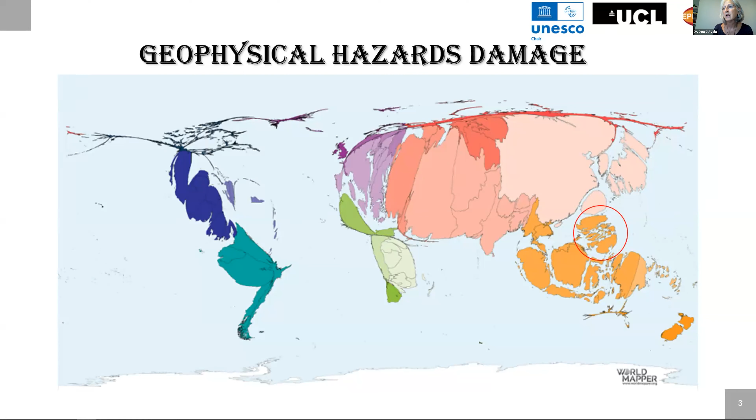So if indeed we map the geophysical hazard damage, so earthquake, volcanoes, landslides and so on, we can see now that the Philippines has fallen quite considerably because the level of hazards in the Philippines is very high. And similarly, if we look at the climatic hazard damage, they are indeed exposed to typhoons and to flooding and weather events quite often.

So if we then summarize this multi-hazard profile, and this is based on data produced by the Global Risk Data Platform of the UN, we can see that both earthquake, wind, cyclone winds, and floods have a large incidence throughout all the islands, and that the return periods are quite high. And if we sum up all the hazards, mapped here in red, we can see that the multi-hazard average annual loss runs in the thousands of USD million. So it's actually a very high proportion. It's one of the countries where the losses are the greatest.

And we know very well that hazard losses and, let's say, disaster means that a country can never properly develop because it needs to rebuild and reconstruct and renew every time. So this is clearly not a sustainable situation.

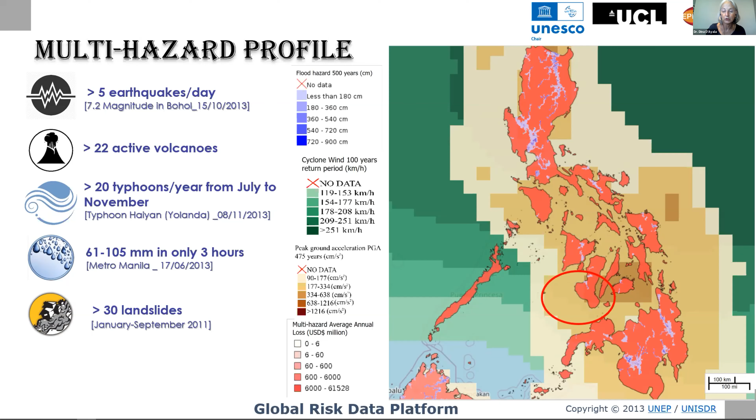For the rest of the talk, I will concentrate on two islands, Bohol and Cebu. Bohol and Cebu were affected by an earthquake in 2013, a very damaging earthquake. And then a few months later, they were also affected by the Yolanda or Haiyan typhoon. And this actually brought further destruction on the collapse and damage already caused by the earthquake.

Just to give you an idea, I'm going to focus on this building here, which is the Loboc Cathedral. Here we have a river and a bridge that went nowhere, but this is another story. You can see from this aerial view that the church is divided in two and that the transept is completely missing.

The Philippines, and in particular those islands, have heritage that goes back to the Spanish period, where several Catholic churches were built by the missionaries and the monks. Some of them are strikingly similar to the cathedrals that we see, for instance, in Peru, in Lima, and in other cities, because they were built by using very much the same technology

that was already distributed worldwide, and this is very interesting, in the 16th and 17th century through the friars' orders that disseminated the religion in this country, and at the same time, they also used local understanding and local technical construction to improve what they were doing.

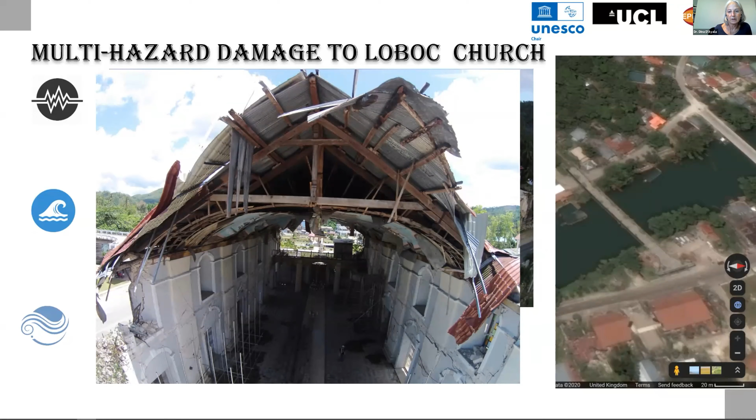And of course, then there was the issue of the water being absorbed into the structures. And then finally, also damage to the roof due to the Yolanda typhoon. This case is not an isolated case. In fact, we studied about 20 church complexes where you had the church, the convent, sometimes kitchen structures, bell towers, dormitories, schools, and some private homes where this damage was recurring.

So the National Historical Monument Commission required a systemic approach to this problem. And we were fortunate enough to work with them to develop such a systemic approach. So when we're talking about multi-hazard risk assessment, this is usually due to the fact that we are aware that there are several hazards.

We are aware of the fact that there is a wealth of assets that are exposed to such hazards, and we need to identify the resources needed. And then we need to compare the resources needed with the resources available. And very often the resources needed are much greater than the resources available. And therefore we need to think about who is in greater need of being prepared for the next hazards. So which of these assets needs more restoration?

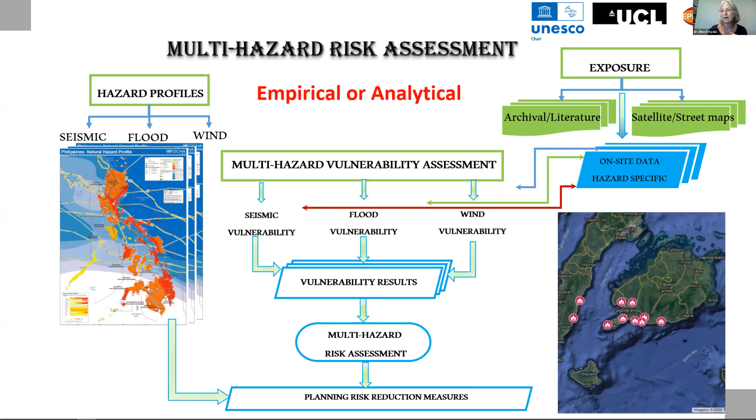So this approach can be either empirical or analytical. It can either be based on observational side or can be done with, let's say, mathematical models and numerical models. So depending on the level of information and the level of approach, we can have different levels of risk assessment. So for instance, here in the green box, we are considering what we call a level 1, where we will do rapid visual surveys.

This will allow us to determine what we call risk prioritization, just say that certain buildings in a particular environment or in different environments, but exposed to the same hazards, might have different priority, and we will see how we can determine these priorities.

Or we can have an extreme, very detailed modeling that looks at one particular asset. So for instance, we could study in very great detail the Loboc Cathedral that I've just presented, and we could do very advanced models, non-linear, with a high probabilistic model of the hazards if we have sufficient information at the site, and come up with this.

Or we can choose an intermediate level, where we can indeed develop some simplified structural modeling, which allows us to have sufficient engineering input in the process by which we can understand how mechanically this building responds to the loading and the effect of the hazards, and therefore allow us to make informed decisions on the mitigation measures that we are considering in terms of repair, restoration, or strengthening.

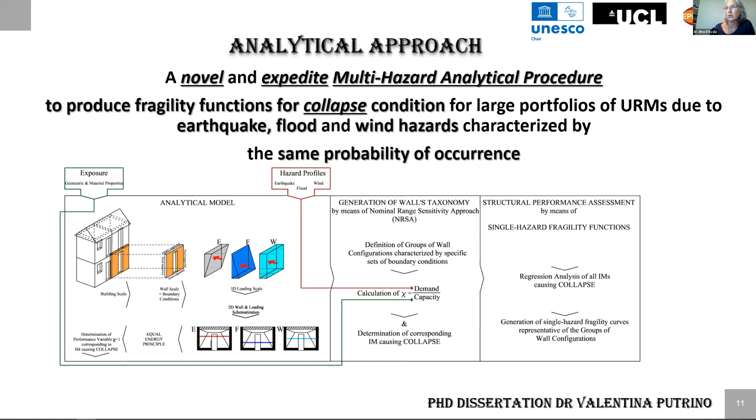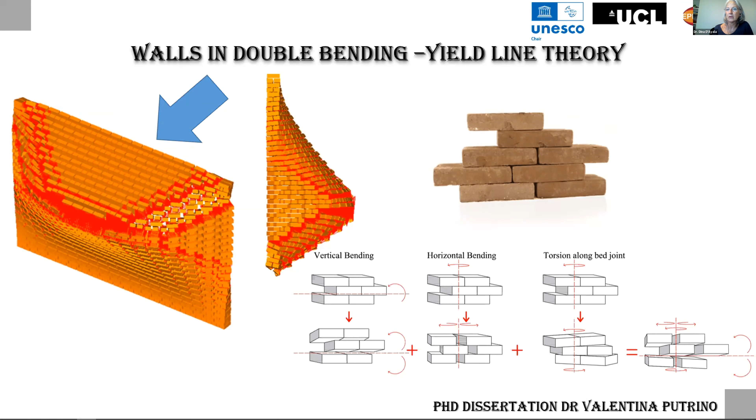But if we can describe each of these effects at local level, we can then develop some relatively simple equations that can be used at the level of the panel in order to determine their capacity. And in order to further simplify things and make it scalable for different hazards, we have also simplified the loading. First of all, instead of considering the dynamic effect, we are considering the static effect.

But also, instead of considering the impact of the load and its distribution on the whole panel, we are considering the resultant of this surface distribution as individual line loading, because this makes the whole problem simpler from an analytical point of view, from a mathematical point of view. So we will see that we have then done various calibrations to make sure that this actually doesn't affect the results.

So how do we approach this? In order to have a generic methodology, we need to consider many different types of walls with different geometry, different aspect ratios, different types of constraints, different layouts, presence or not of windows, and this will give us different groups of wall panels. We then need to consider different sizes, different ratios, as I said. We need to consider the relationship of the size of the panel to the size of the brick units. So we will also consider different sizes of the units and different material characteristics, i.e. their capacity to resist flexure in two directions and also the capacity to resist shear.

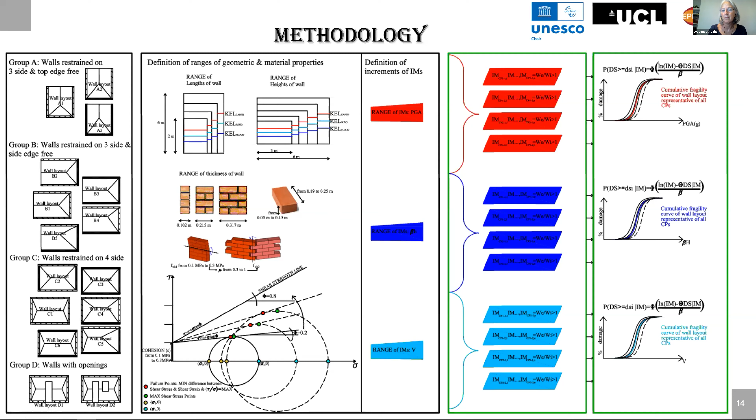Before going on to the results, please let me know how much more time I have, if any.

We can look at the inputs, but also at the fact that, again, we need to consider how the cracks will form in the real brickwork. And this will be strongly influenced by the resultant of the load at a particular height. So for instance, if this is flood loading, we know that the flood will have a hydrostatic distribution that is triangular, and therefore the resultant will be at about 1/3 of the height if the flood goes to the full height of the wall. And that push at that level will create the failure.

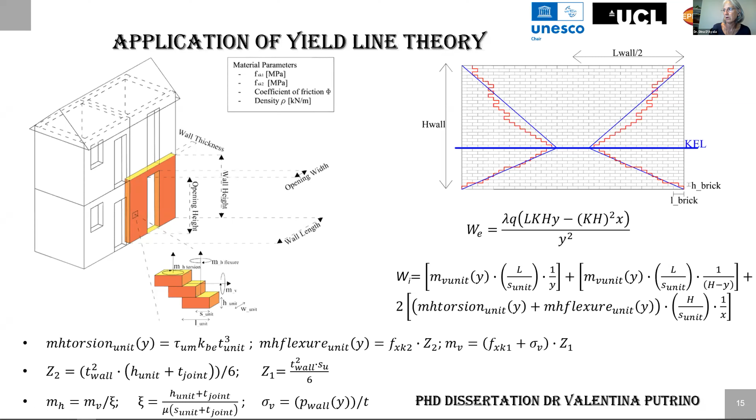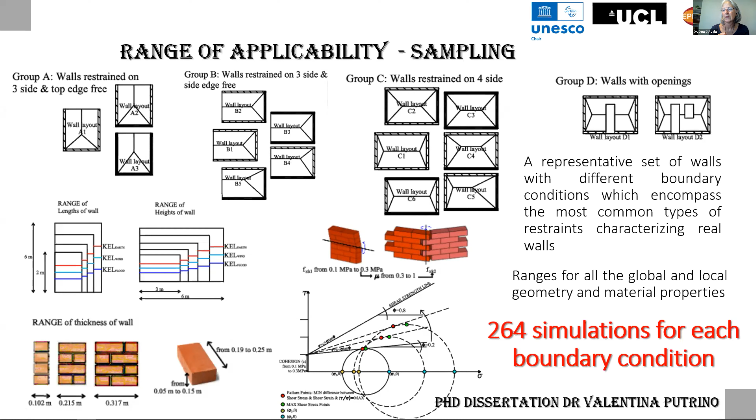By using virtual work and by equating the work done by the applied load with the internal resistance and dissipation of energy done by the moments, we can then equate and optimize, and we will find the minimal collapse factor, which identifies the intensity at which the wall fails. So in order to generalize this, we have done 264 simulations for each boundary condition, changing the geometry, the characteristics of the materials and of the bricks, the presence of openings and so on, so that we have a sufficient set to then do regressions.

This is done via a relatively simple Excel-based and Visual Basic-based program that basically considers a large number of possible paths to collapse and then converges on the one that provides the smallest collapse factor, as I already mentioned.

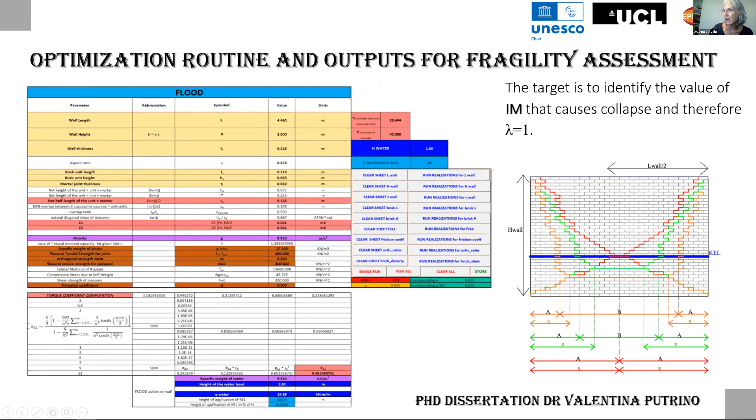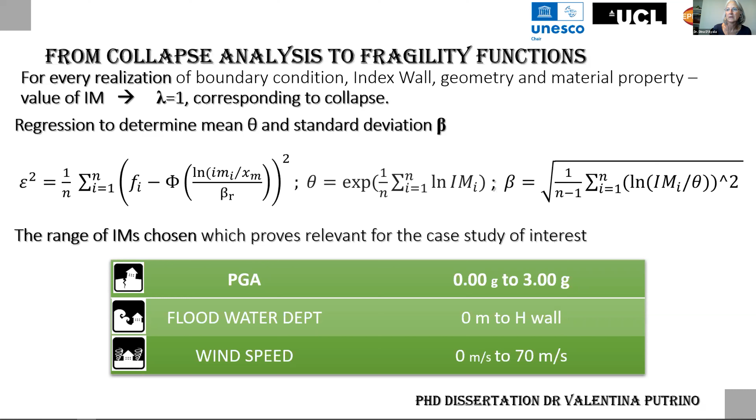And the collapse factor will be the one that gives the value of 1 for that identified intensity measure. So we can then consider a large range of PGAs, water depths, or wind speeds, so accelerations, in order to get the regressions to determine the mean and the standard deviation of our regressions. And this brings us to considering a number of different fragility functions.

So here, for instance, we are looking at fragility functions for different groups that represent different constraint conditions. Very often when you go on site, you will not know what the constraint conditions are initially. So you will only have the geometry. So we cannot discern between these different groups. So we have just one unique fragility function that gives us a particular fragility for the entire group. And this, as you can see, is different. Or if we have a lot of information, we know about the

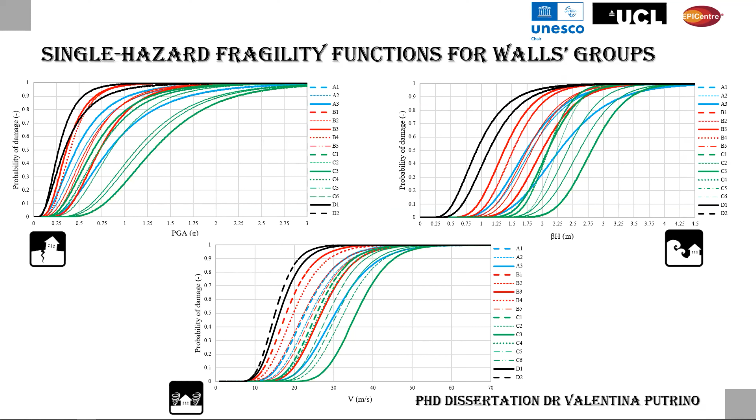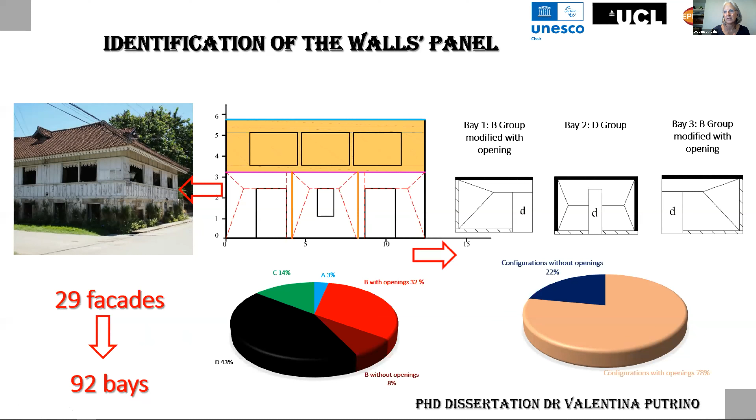So depending on the presence of, for instance, internal walls here and the presence of the window, we can divide the complex facade in panels, and we can analyze the panels separately, associating them to a particular group, which is then modified with the opening. As you have seen earlier, there were openings only in 2 types of groups, but now we are also considering the opening for other groups. So we have tried this on 29 facades, we obtain more than 90 panels, and these panels can be categorized as the pies that you see down here.

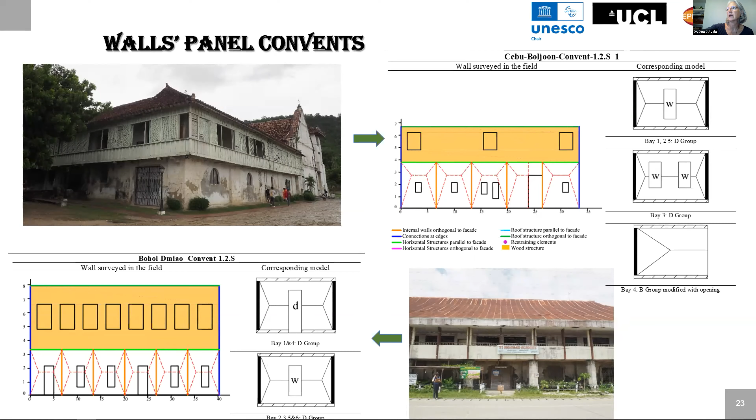So these are, for instance, 2 examples where the upper and lower constraints will also be dependent on the type of flooring and the type of roof that we have, whether the roof or the floor is tied into the structures, which is something that is common not only in the Philippines in this type of constructions, but also in Peru. And depending on that, we will have different collapse mechanisms. So these are the parameters that we need to run our analysis. As you can see, there are only 12 parameters, and these are the range of values in the samples that we have identified.

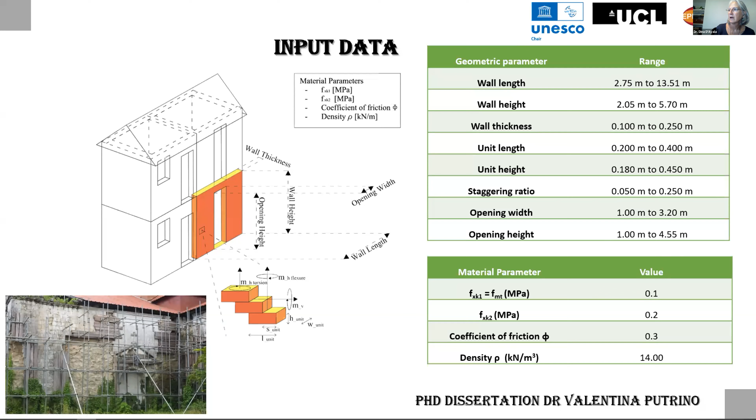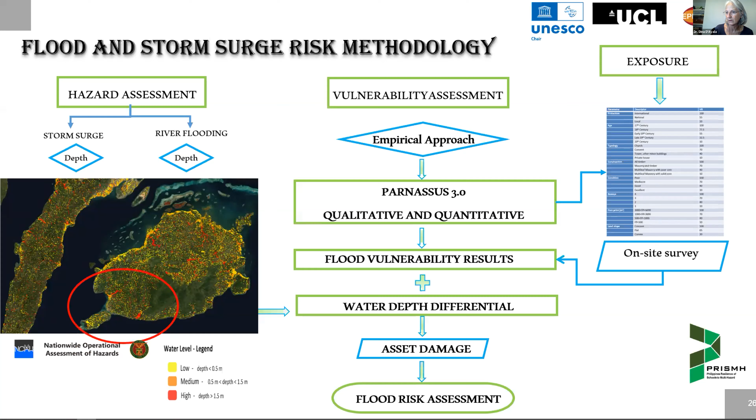We are concentrating on the southwest of the island of Bohol. We identify the area, we identify the parameters that are specific to each building. We then determine the data collections, and we create what we call a vulnerability index, which is the result of the scoring of each of the indices. This provides us with a vulnerability curve for the samples.

And we can then determine damage functions, which include economic losses, but also historic values. And we can then, for each of the buildings and for each of the water depths associated to a particular position, identify the number of buildings that will be at a certain value of that depth, and therefore the overall cumulative risk and cost to repair or mitigate.

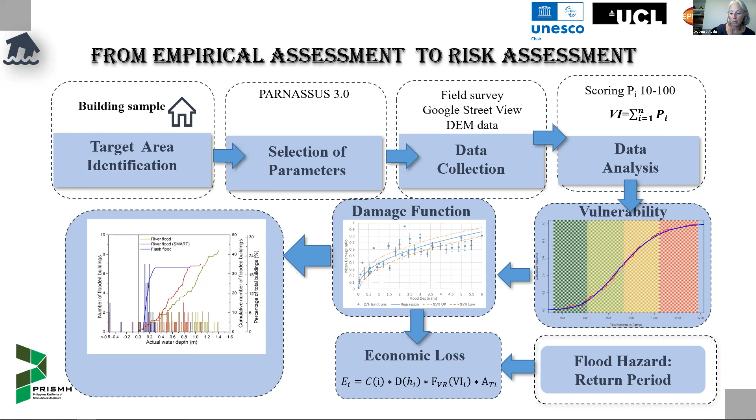So this is, for instance, the case for some of the churches in the southwest of Bohol, and you can see that the level of flooding or the level of storm surge is different for the different churches, with a 100-year return period.

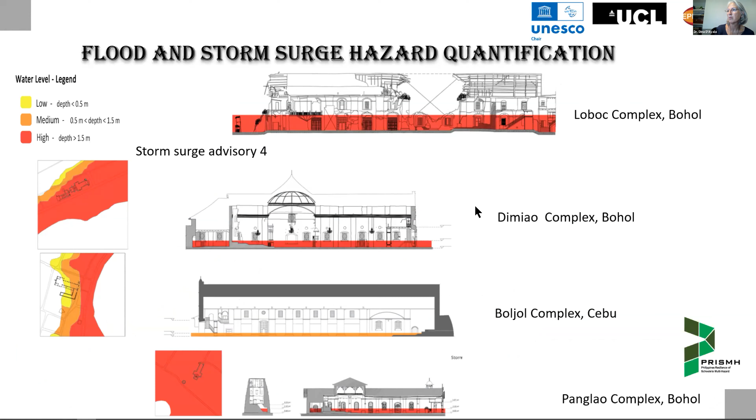These are the type of information that we collect, and this is in relation to the convent in Cebu. We can see here clearly what is the effect of this flooding on this building, and how this can be prevented, for instance, by having barriers or solutions outside of the building, so that the water will not reach the structure itself, such as the level of the drainage system, the surface permeability, the creation of a plinth. Very often these buildings don't have a plinth, and the internal flooring is lower than the external level of the ground.

So we can create distributions, as I said, for each of these indicators, and for the scoring, that distribution can be divided in quartiles to decide which are the ones at greatest risk. And then we can associate a level of risk to each of them.

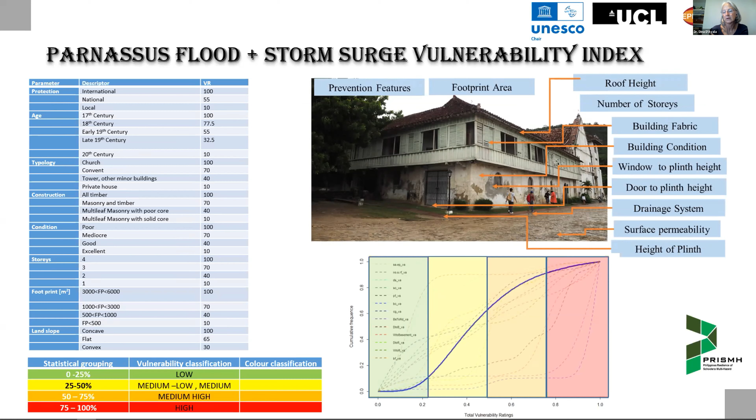And if we repeat this process for all other hazards in a similar way, just by using a number of indicators and considering different effects, then we can actually arrive at a qualitative risk assessment, which again allows us to compare the different risks associated to the different hazards, and therefore to make decisions in terms of the mitigation that needs to be taken.

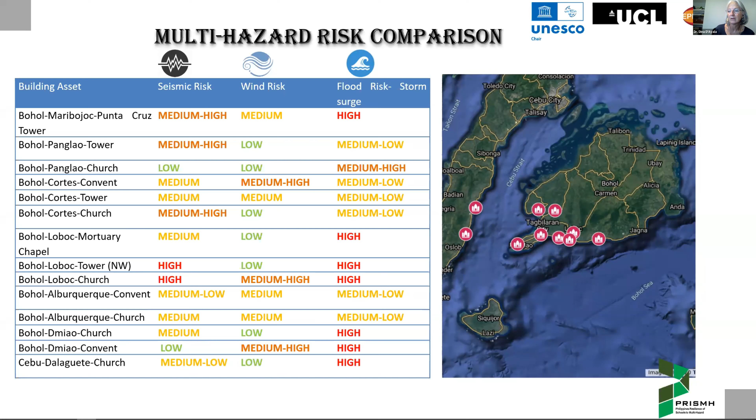So this concludes my presentation. I'm sorry if I've gone a little bit over the time. The objective is to find the right balance between accuracy and simplicity, especially when we are dealing with so many different assets and heritage assets. The limitation is very often due to the hazard characterization. So what do we really know about the hazards and how good is the availability of data, and that will determine the data collection strategy. Collecting data is always very expensive, so it's very important to know what data is already there.

Whether the engineering expertise is there and available to identify the failure modes and to identify how to compute their capacity, and then the ability to determine commensurate fragility functions for different hazards that can then be used to determine effective risk. And these actually have a very good visual character and content that can help effectively communicate risk to the administration and help in the attempt to secure investment.

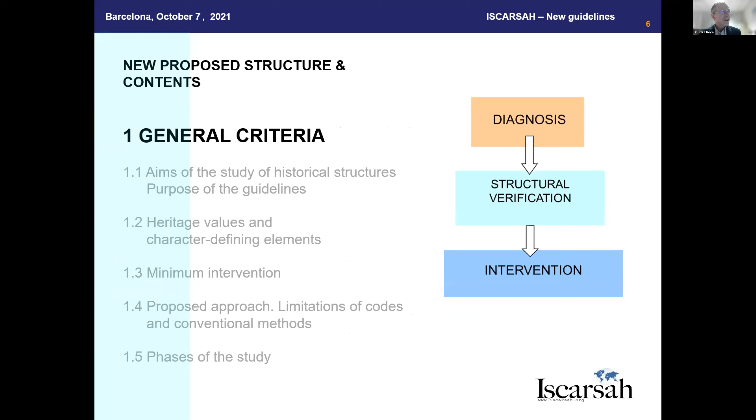Let me focus on them. But first, let me state with more clarity the purpose of the guidelines. First, we want to provide criteria and assistance for the study and intervention on heritage structures. In particular, we would like to provide guidance in the application of more fundamental documents, such as the ISCARSAH principles and the Annex I on heritage structures of ISO 13822 that I already mentioned.

The guidelines we are now developing are based on the premise that the study and care of architectural heritage requires a combination of both scientific and cultural insight. The design of an intervention must be oriented to identify the best possible solution, considering both the structural performance - what the structure should be able to attain in terms of safety and satisfactory performance, to avoid any problem to people - and, along with this, the heritage values must be considered, since possible interventions may impact on the heritage values in which the cultural value of the building resides.

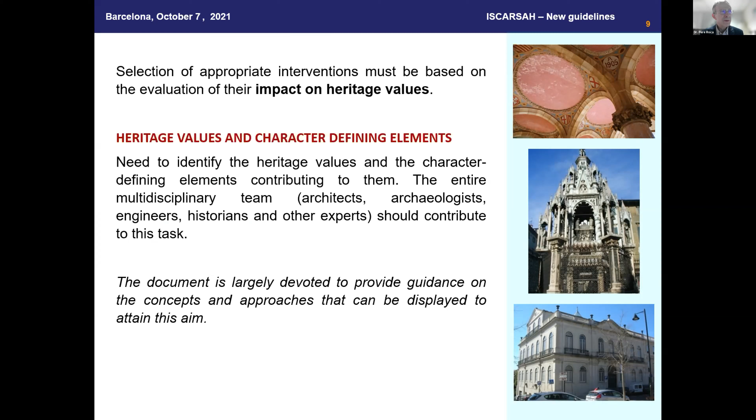Again, this is a task entitled to the entire multidisciplinary team, including architects, archaeologists, engineers, historians, chemists, and other possible experts, who should contribute to identifying the heritage values and the character-defining elements. However, the guidelines try to help in this activity, trying to identify some possible character-defining elements. We distinguish between tangible and intangible character-defining elements.

Among the tangible character-defining elements, we identify the geometry, including the shape, the spatial configuration, the formal design, the materials and fabrics, the overall structural organization, the construction details and the connections between or among elements, the location and setting, either urban or rural, and significant historic modifications.

We understand that all architectural additions that may have been produced in different historical periods contribute to the final configuration of the building and should be respected. And perhaps even more controversial, we also believe that imperfections and damage should also be identified as character-defining elements and should be respected because they also contribute to the final historical configuration of the building, to what the building finally is, all the aspects that may have influence on its history.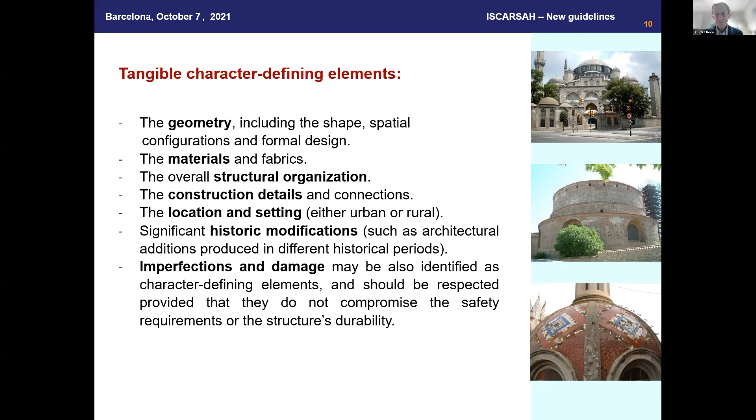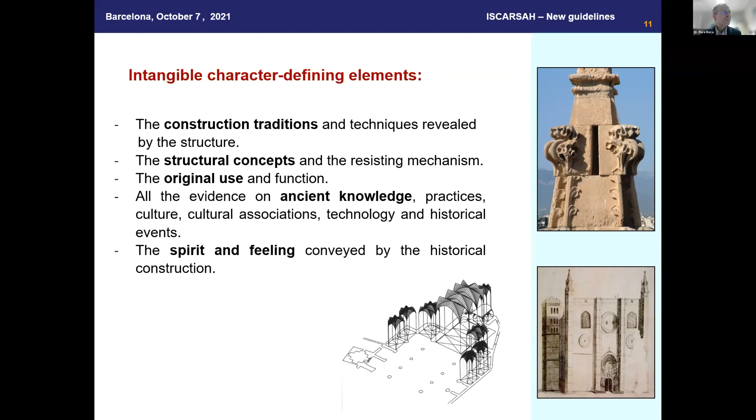Among the intangible character-defining elements, we identify the construction traditions and techniques, historical techniques, as revealed by the structure, the structural concepts and resisting mechanisms of the structure, the original use and function, all the evidence on ancient knowledge, ancient practices, culture, cultural associations, technologies, as also revealed by the structure, and the spirit and feeling conveyed by the historical construction, among other possible intangible character-defining elements.

We also suggest, as a very central idea in the guidelines, that any intervention on a heritage structure will cause, to some degree, certain positive or negative impact on the heritage values. We should be able, at this stage, to identify the heritage values and should also be able to quantify the possible positive or negative impact of possible interventions on these heritage values.

At this stage, we are in the condition of introducing the concept of minimum intervention. That's also a critical concept which recurrently appears in the guidelines. We propose a definition: minimum intervention is defined as an intervention that optimally combines compliance with structural requirements with the maximum possible protection and enhancement of the heritage values.

We should obviously comply with the structural requirements, I will insist later on this. However, we should do so in a way that allows us to respect and even enhance the heritage values identified in the building. Obviously, the minimum intervention must ensure the protection of human life while also paying attention to environmental issues and cost effectiveness. Actually, the guidelines are largely devoted to discussing the strategies and approaches that may lead to the design of minimum interventions, and I will try to briefly refer to them and illustrate how the guidelines intend engineers and architects to deal with these difficult problems.

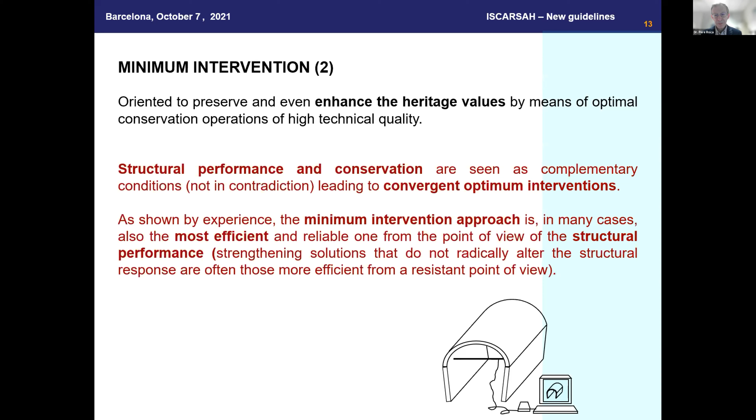The guidelines recognize that conventional calculation techniques and legal codes or standards, normally oriented to the design of modern constructions, may be difficult to apply or even inapplicable to ancient constructions. Conventional calculation techniques and legal codes may not be useful for the study of a historical structure. Therefore, we need an alternative approach.

As an alternative, we propose a more flexible, multidisciplinary approach, strongly based on the scientific method, combining at least 4 activities: historical research on the building, inspection oriented to investigate the present condition, decay and damage in the building, monitoring, and structural analysis. All these activities are equally important and complementary, and should be conveniently integrated and combined in the analysis.

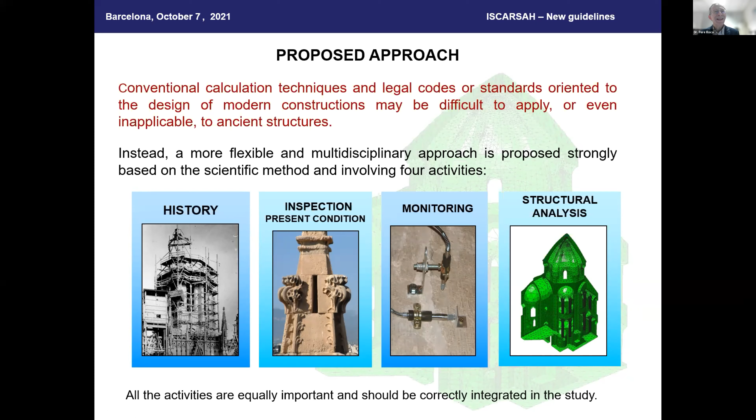Let me speak about the 3 phases of the study. We distinguish among assessment, structural verification, and intervention. All the phases should be consistent with each other, based on similar and consistent approaches, criteria, and methods. The methods we use for assessment should also be applied to structural verification and even to intervention, used consistently across the entire process leading to the final design.

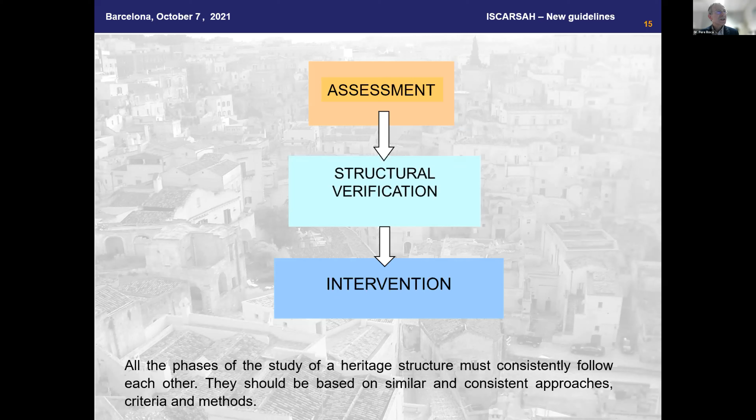So let me now briefly discuss the 3 phases, starting with assessment. Assessment includes all the studies needed to obtain conclusions on the present condition of the building and the causes of existing decay and damage. It includes all the data acquisition campaigns and investigations needed to reach the conclusions, such as laboratory testing, field testing, and others.

It is directly based on the combination of the activities I've mentioned: historical and architectural research, inspection and investigations for architectural and structural documentation, monitoring, and structural analysis. In this context, structural analysis investigates the performance of the structure under past actions, contributing to diagnosis by simulating these actions to understand how they contributed to the present damaged condition and the causes of the final damage condition.

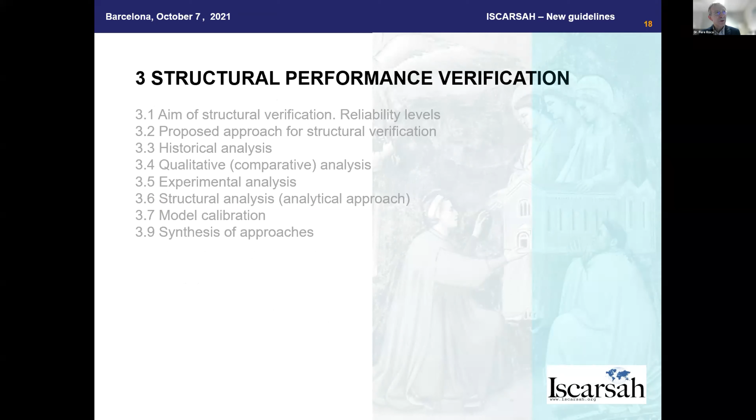Let me now speak about structural performance verification, in which the guidelines may be suggesting some, I think, more controversial ideas. Let me first speak about the aim of structural verification.

Let me do so by showing this well-known fresco by Giotto in Cappella degli Scrovegni in Padova, in which we see the people, who of course must be kept in safe condition in the intervened building. But we also see the building itself as a cultural heritage object that must be preserved, taking into account its heritage values and character-defining elements. And then we see the fresco with its high value.

We have actually three elements: the people, the building, and the fresco, or the very valuable immovable heritage attached to the building.

Structural verification in the case of a heritage building involves obtaining conclusions on the structural performance and the possible need for strengthening intervention. This activity should take into account three intimately related but different targets: first, the safety of people at risk; second, the integrity of the structure itself as a cultural heritage object, taking into account its authenticity; and third, the safeguard of valuable immovable cultural and artistic contents. These three targets have to be simultaneously considered when assessing the structure's performance and the possible need for strengthening interventions.

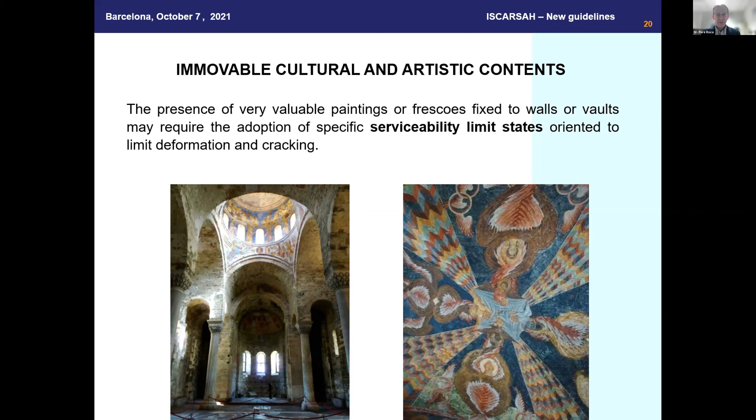A potentially controversial idea, which I would like to offer to everybody regarding the guidelines, is the possibility that we consider reconsidering the structural reliability levels. We mentioned that in some cases, protecting the structure's heritage values may require the acceptance of a safety reliability level lower than that implicit in building design codes. We, in other words, are available to lower the safety reliability levels considered in the study and intervention in the building.

The need to reconsider the reliability levels may appear when a satisfactory solution with sufficiently limited impact on the structure's heritage values is not possible. Finding an intervention solution with sufficiently limited impact on the heritage values may not be possible in cases when the structure shows severe damage or very severe structural deficiencies. We accept this possibility. We are available to reduce the safety level, the reliability level.

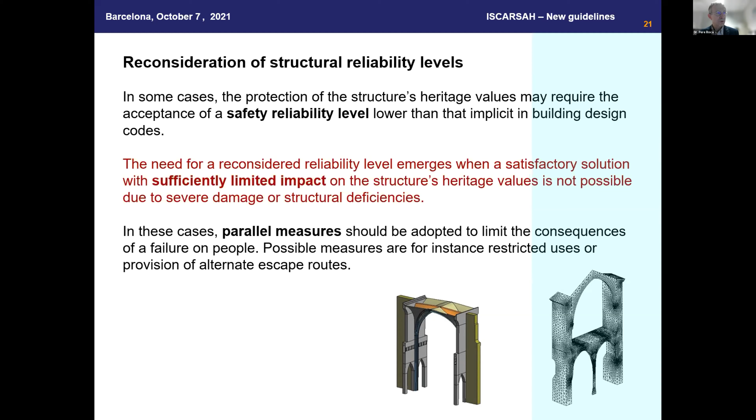As for assessment, we also have a proposed approach for structural verification based on the combination of 4 activities. The 4 activities, which are similar to those presented for assessment, in this case are historical analysis based on the investigation of the past performance of the structure. Second, qualitative, also called comparative analysis, which is based on the comparison of our building with similar constructions whose behavior is already understood. Then experimental analysis, consisting in the execution of on-site experiments aimed to measure the load capacity of structural members. And finally, but not less important, the analytical approach based on the use of structural analysis to predict the performance of the structure under future actions.

As you will remember, I mentioned that in assessment, the structural analysis is oriented to analyze the performance of the structure under past actions. In the frame of structural verification, the structural analysis is oriented to predict the performance of the structure under future actions. We clearly state that this activity requires a calibrated and verified model; there is the need for model calibration and verification. And in the guidelines, we offer a discussion on possible approaches for model calibration.

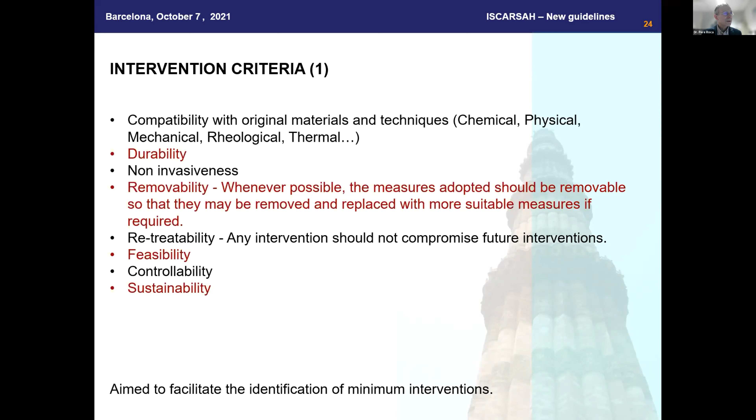Then we offer a discussion on how to apply these criteria in practice. We recognize that applying, enforcing all these criteria at once simultaneously may not be possible. We need to be flexible. We recognize that the criteria should not be regarded as absolute principles. However, they can be seen as guidelines or inspirational principles that may assist in the design of solutions approaching the

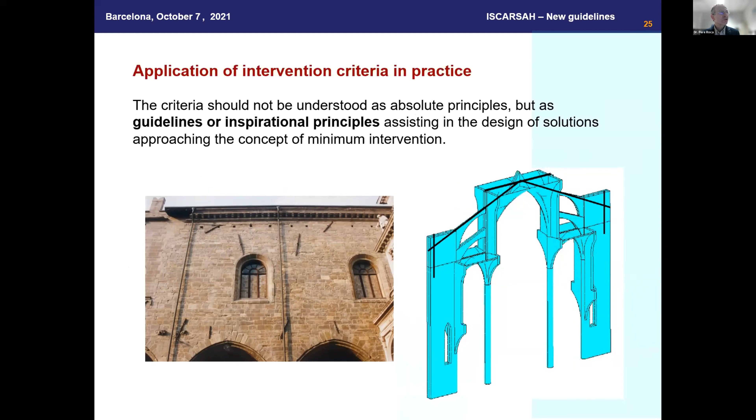concept of minimum intervention. And then we also propose a possible approach, an engineering approach for the design of the minimum intervention based on these criteria. The proposed approach is based on this flux diagram. I will quickly describe how it works. According to the engineering approach that we suggest to use, first of all, we need to set up some reliability levels. The reliability levels to be requested to the structure have to be, first of all, defined.

After setting the reliability levels, we may start the process by envisaging possible intervention solutions. A number of alternative solutions should be envisaged. Solution 1, solution 2, solution N. As many as possible alternative solutions should be envisaged, all of them satisfying the requested reliability levels. Then for each of the solutions, we should measure the impact on the heritage values. And therefore, we have an impact 1 for solution 1, impact 2 for solution 2, impact N for solution N.

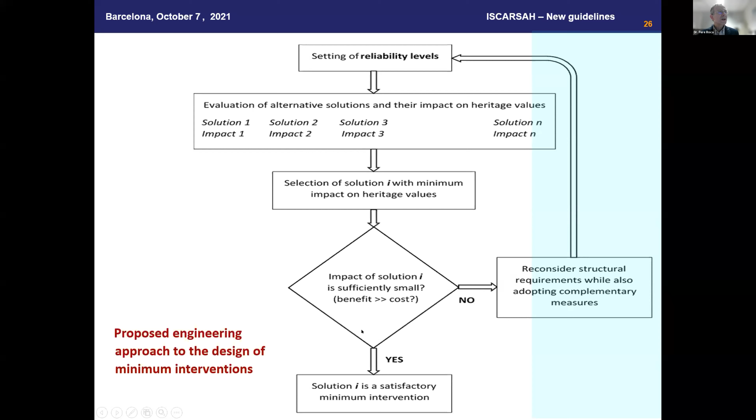If the impact is sufficiently small from this point of view, the solution selected can be considered to be a final minimum intervention, and we can retain and present it as a targeted minimum intervention. Otherwise, we may need to reconsider the structural requirements. Remember that when reconsidering the structural requirements and reducing them, we then need to adopt complementary measures. And by adopting a reduced set of reliability levels, we then can start the process, envisaging new solutions, and try to finally reach a satisfactory minimum intervention with a sufficiently small impact on the heritage values.

This means that we should be able to quantify the impact of interventions on the heritage values. This may be a difficult task. However, the approach proposed actually requires to investigate the impact of interventions on the heritage values. We can do so at least in a qualitative way. At least we may try to qualitatively categorize the impact of interventions. In the guidelines, we try to help in this task by distinguishing among three categories. The first category involving solutions with positive or low negative impact. A second category with moderate negative impact. Another category with high impact on the heritage values.

There is no time to discuss all these categories. Let me, however, present the case of interventions with positive impact or very low negative impact on the heritage values. In this category, we consider maintenance solutions, stabilization operations, repair interventions or strengthening interventions. First, preventive or regular maintenance operations that do not produce any sensible alteration on the existing material. Second, stabilization operations carried out with fully non-invasive and removable technologies.

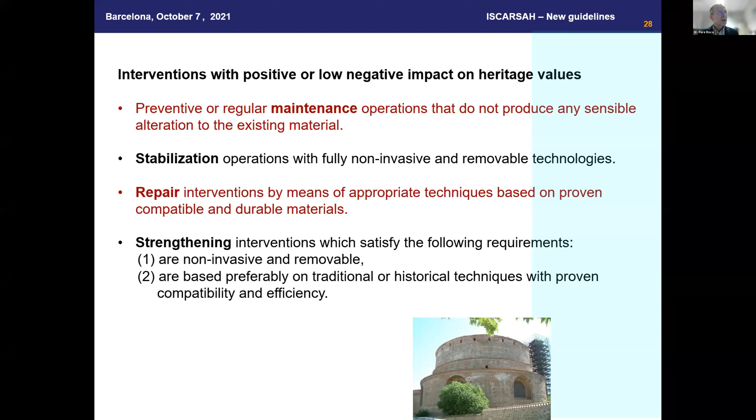With that, I finish with some final remarks. As you have seen, we propose to carry out the study based on a multidisciplinary, flexible, and broad approach, which is based on the combination of different activities, including historical research, inspection, monitoring, and structural analysis. The minimum intervention is presented as the main target of the entire envisaged process. However, finding a minimum intervention requires first to identify and investigate the heritage values, and then to evaluate the impact of proposed interventions on the heritage values as part of the decision-taking process.

We also propose an engineering approach for the identification of minimum interventions that, as explained, is based on the investigation of a set of possible alternative solutions.

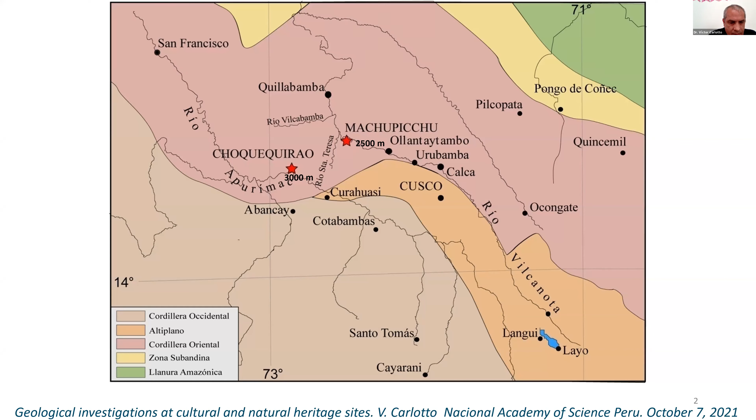Machu Picchu and Choquequirao are located in the Eastern Cordillera of southern Peru, which is traversed from east to west by the Vilcanota and Apurimac rivers, developing abrupt canyons. These 2 sites are separated by mountains that exceed 5,000 meters, and which were very important in the religiosity and cosmovision of the Incas.

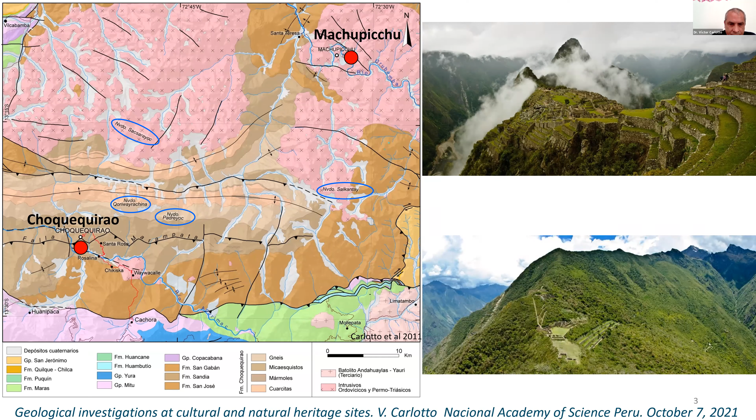In Choquequirao and its surroundings, including the access road from Cachora, schist, mica schist, gneisses, and quartzite crop out, while most of the sanctuary of Machu Picchu is found in the Machu Picchu batholith in red, where granite predominates. The Inca city of Machu Picchu is built on intrusive igneous rock, which is cut by faults and fractures that have controlled the geomorphological evolution.

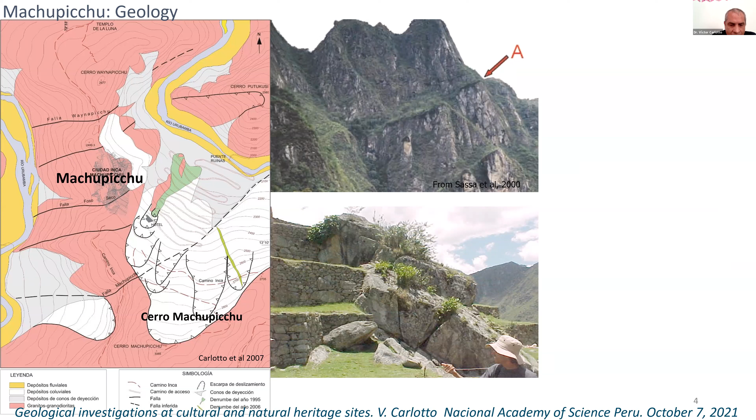Recent deposits and quaternary soils contain granite blocks that have broken away from the main rock body, forming what is known as granitic chaos. Additionally, ancient landslides such as Cerro Machu Picchu and recent superficial landslides have been identified.

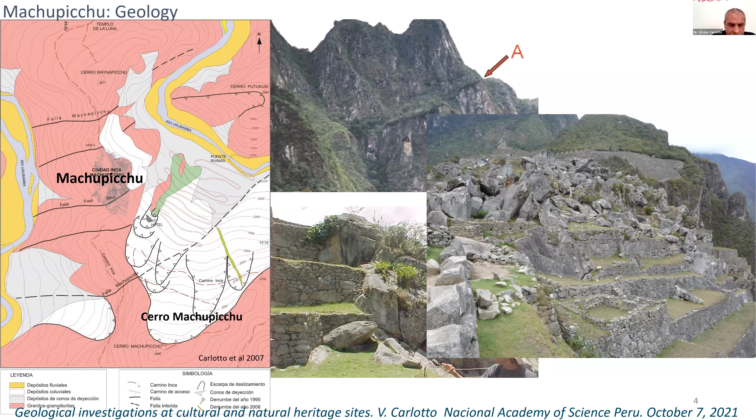In order to begin with the topic of conservation, it is important to remember that between 2000 and 2001, the Japanese mission led by Professor Sassa gave a hypothesis indicating the existence of a large deep landslide that would destroy Machu Picchu. These ideas attracted international attention, and an international consortium was set up to evaluate this hypothesis.

The Japanese, Italian, Czech, and Peruvian Canadian missions conducted geophysical studies, satellite and terrestrial interferometry, extensometer and dilatometer measurements, etc. The conclusion in the 2005 international workshop was that there is no large deep landslide that may affect or destroy Machu Picchu. Here, the signed document. I will share some examples of the studies.

The Geological Service of Peru, INGEMMET, carried out the geomechanical study and evaluation of the stability conditions of the proposed landslide. The stability analysis, which included calculation parameters such as cohesion, friction angle, seismicity, and presence of water in the failure, has shown that the Inca city of Machu Picchu is stable under extreme conditions.

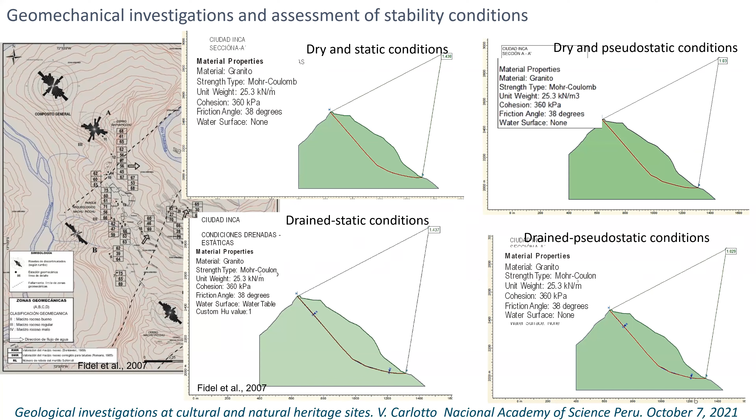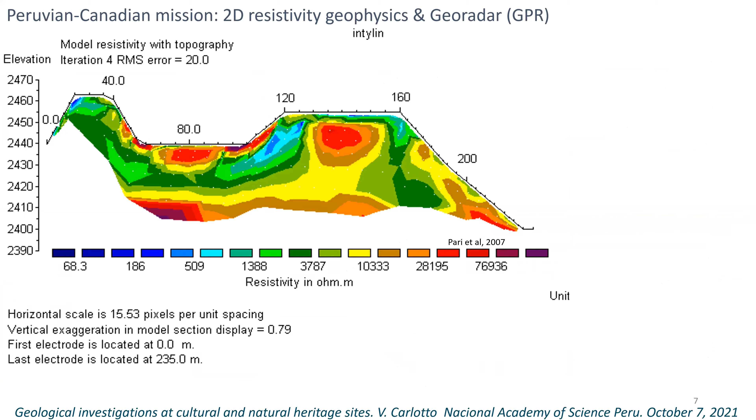This is the graphic. All the conditions of the calculation parameters indicate that Machu Picchu is stable. In addition, the geophysical studies carried out by the Peruvian Canadian mission do not show a deep landslide as indicated by the Japanese, only superficial slides which were stabilized by the Incas, as we see here.

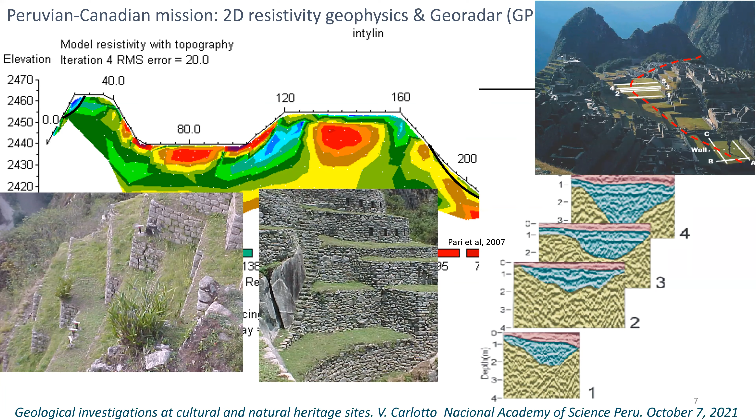The georadar in the sliding fault zone does not show any evidence of failure, but substrate and filling which the Incas made to stabilize the granitic chaos. To explain the phenomena that affect Machu Picchu, we first need to explain the geomorphological conditions which the Incas found before building the city, that is, the presence of what is called granitic chaos or granitic block accumulation.

The origin of granitic chaos is evidenced in this picture. The granite cut by fractures and faults is affected by water and will produce blocks separated by gravity. The Incas built a series of terraces, platforms, and containment walls to stabilize the granitic chaos. It was only after that they started building houses, temples, and palaces.

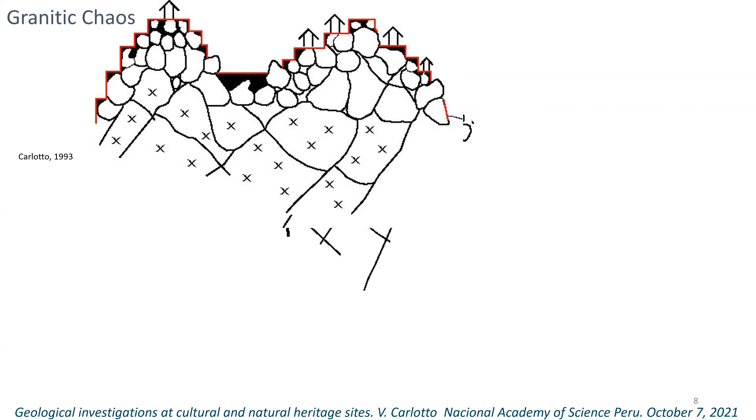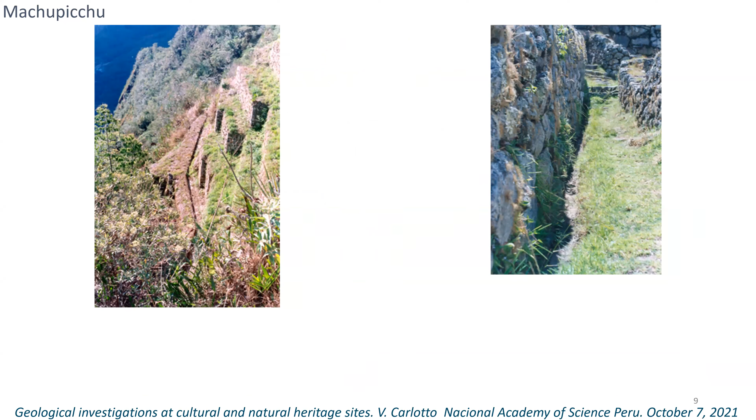A quarry of this rock is still visible on one side of the city, and it explains how this granite chaos was in the process of being stabilized, but it was never finished. During the Inca occupation, the terraces, platforms, and buildings were adequately preserved by gutters and roofing, which helped to evacuate the abundant rainwater, but this is no longer intact.

The drainage system had not been maintained, which allows the water to penetrate the soils. This water washes away the clays and silts that act as a matrix between the blocks of granitic chaos, and also lowers the resistance to soil movement. This, in turn, causes the rocks to sink, as is evident in the Temple of the Three Windows, the Temple of the Sun, and the other constructions.

This settlement caused imbalance and separation of the joints, the areas between stone and built stone, as can be seen in the window of the Sierpes, in the royal tomb, or in the room of the Ñustas. These movements occur very slowly, but if this trend continues, constructions such as the main temple will be seriously affected in 20 to 30 years, or maybe collapse.

The city area has also experienced numerous superficial landslides, although many of the most susceptible areas were stabilized by the Inca terraces. However, here too, the lack of an adequate and operative drainage system has caused the reactivation of landslides, as can be seen on the western and eastern slopes of the city.

As a background, starting in the 80s, the detailed geological and geodynamic mapping of Machu Picchu was carried out. In addition to the rocks and faults, the surface landslides, settlement areas, surface erosion, etc., were mapped, as well as the infiltration zones and preserved and destroyed Inca drains, all this in order to give recommendations that might serve the conservation and maintenance plan of the Inca city.

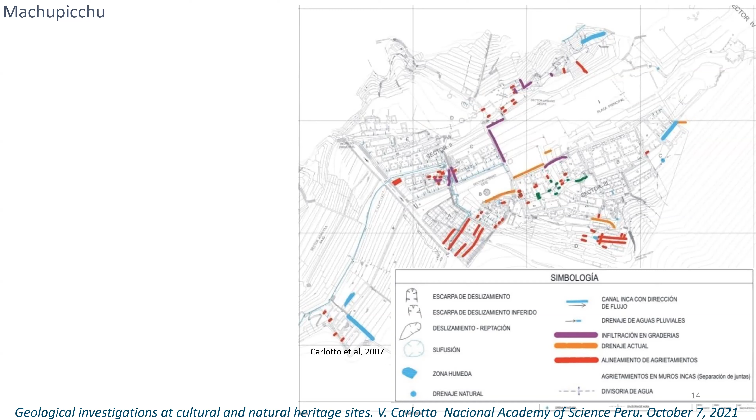Basically, two subjects are considered. First, the construction of waterproof floors to replace the lack of roofs, and second, restoring the Inca drains. This prevents rainwater from causing settlements, landslides, etc. In effect, these recommendations have been implemented since that date, began with the Temple of the Sun, and are currently advancing across a large part of the city.

These photos and map correspond to the eastern part of Machu Picchu, where the waterproofing of floors and restoration of drains is recent, from 2018 and 2020, and is based on previously carried out studies. Therefore, this process has been implemented throughout the Inca city.

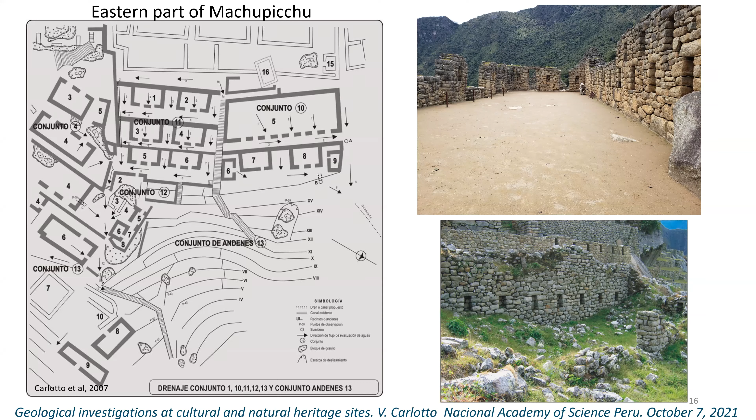As a conclusion and recommendation for Machu Picchu, we can say the phenomena that affect the Inca city are superficial, and their origin is directly related to the presence of water due to the lack of roofs and the non-functioning of the Inca drainage system. The recommendation is to complete the restoration of the Inca drainage system and the construction of the waterproof floors, which will allow an adequate evacuation of rainwater and avoid external geodynamic problems.

Now, I am going to present Choquequirao. As we saw previously, in Choquequirao and its surroundings, schists, gneisses, and quartzites crop out, all affected by geological faults. These rocks were used to build the archaeological site. The most important Quaternary deposits are of colluvial origin and generally originated from landslides. Choquequirao has been built in a zone of unstable landslides. The question is why the Incas chose this site. The answer we will see later.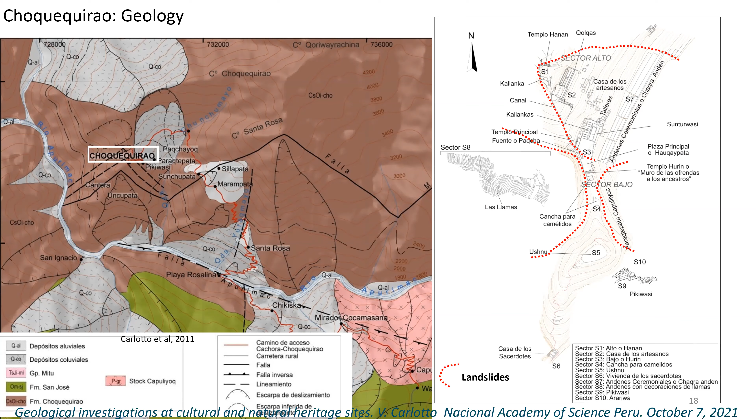In this photo, we can see that Choquequirao was organized in two parts: the high sector, or Hanan in Quechua, and the low sector, or Urin, along a hill in a north-south direction, very similar to Machu Picchu. Here, we can visualize this large platform or andenes called Chaqra Anden.

Here we can see the Hanan or upper sector with the Hanan temple, the qolqa system or food warehouses, as well as channels and retaining walls. Here, the lower sector or Urin hosts the most notable buildings of Choquequirao. Such constructions are arranged around the main square of Haucaypata, which is surrounded by the Kallankas, the main temple, and the andenes of the lower part or Chaqra Anden.

In Choquequirao, there are landslides developed on the eastern and western slopes, leaving a ridge oriented north-south on a saddle between them. Close to this extremely unstable ridge, the Incas built Choquequirao, but previously they stabilized it due to the importance of the site. The most important part of the stabilization corresponds to this set of platforms called Chaqra Anden, with a length of 207 meters, that managed to stabilize the major landslide.

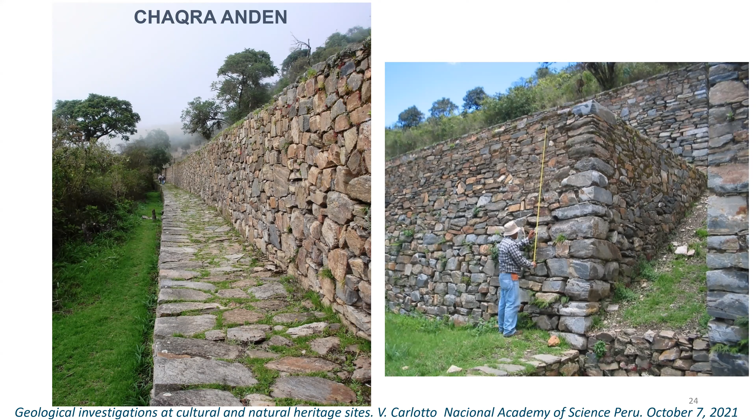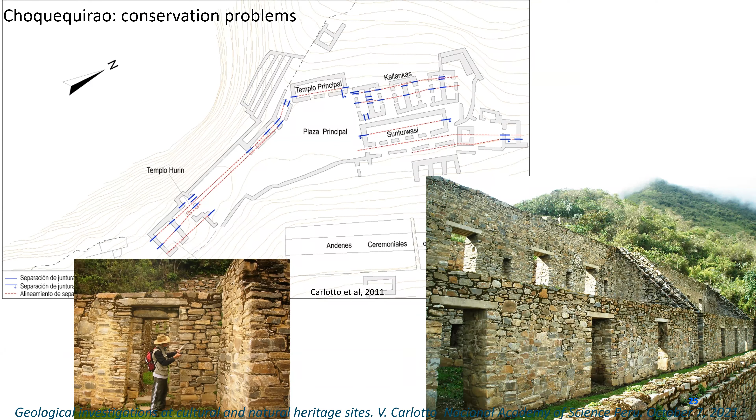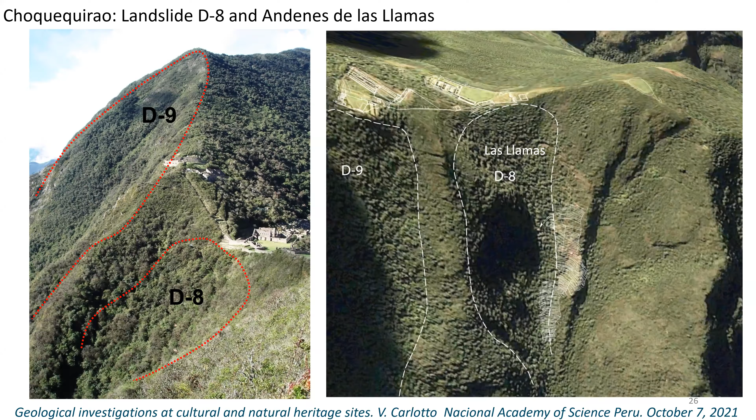Finally, in the Choquequirao area, there are platforms known as llamas that stabilize the western part and mainly the D8 landslide, which is in a very high slope area between 60 to 70 degrees of inclination. In the D8 landslide, the Incas built a system of platforms that are being restored, but the most important is the Andenes de las Llamas, which are located on the southern edge of the landslide and are partly anchored on rock.

This platform system, in addition to having stairs and steps in the retaining walls, also has a drainage system that allows the water to be efficiently evacuated. This Inca infrastructure has allowed the terraces to be preserved for more than 500 years, thus demonstrating their high knowledge in geological, hydraulic, and construction engineering.

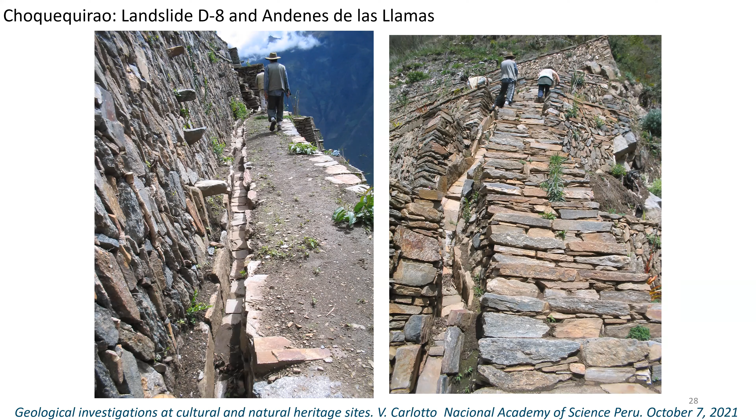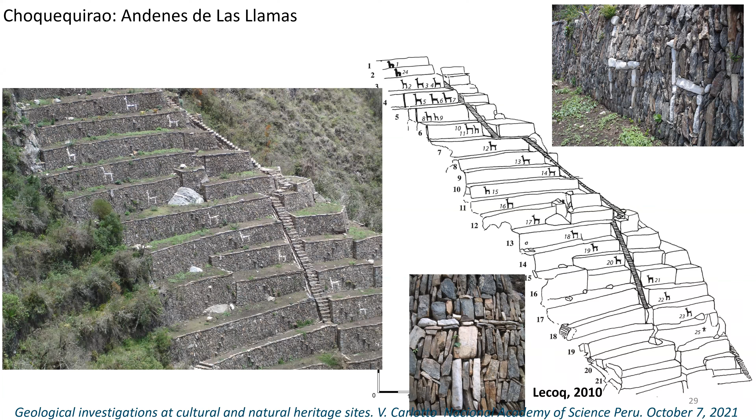In addition, the interpretation indicates that Choquequirao and Machu Picchu have many archaeological similarities, such as having been organized in two halves, Hanan High and Urin Low. The location of the site seems to have been carefully chosen and planned, based on relief, the Apurímac and Vilcanota rivers, the mountains and the glaciers surrounding the sites, suggesting a close relationship with water and fertility.

On the other hand, the relief on the saddle back of Choquequirao is similar to that at Machu Picchu, a product of landslides. The great coincidence is the almost north-south direction of these reliefs. We think that the choice of these sites had to do with this north-south axis.

Therefore, all engineering works had a very important goal: to make these sites stable, because among other things, they were selected to have favorable orientation for astronomical measurements and be able to follow the movement of the sun in east-west direction, and knowing the solstices and equinoxes, that is, organizing the agricultural calendar within a ritual context, one on the northern slope of the Apurímac River and the other on the southern slope of the Vilcanota River.

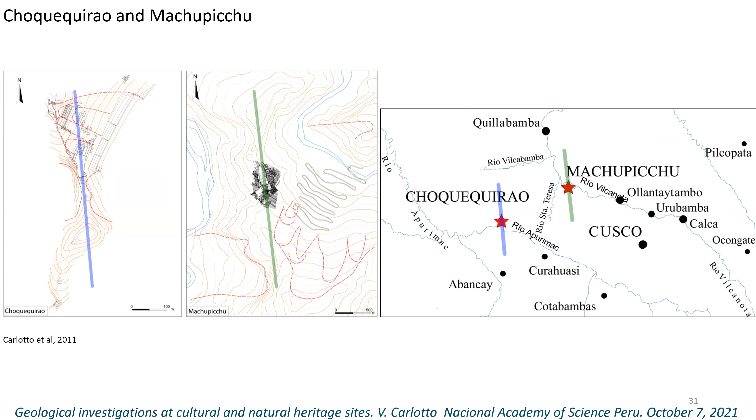Now, let's see Caral. The sacred city of Caral is the most ancient urban settlement with monumental architecture in America. Its antiquity has been confirmed by dozens of carbon-14 dates between 5,000 and 4,000 years before the present, and it would have had between 500 and 600 years of occupation. It is located on the left bank of the Supe River at an altitude of 300 meters in the central coast of Peru.

The sacred city is located on a river terrace of the Supe River and on alluvial deposits of debris flow at the mouth of the Chupacigarro stream. There is an overlap of alluvial deposit on the fluvial terrace. In this image, a wind dune transverse to the Chupacigarro Creek stands out. It gives the impression of being a containment dam.

This is a geological map of Caral where the most important quaternary deposits are shown. These are the river terraces of the Supe River and alluvial deposits of the Chupacigarro Creek. In the surroundings of Caral, there are intrusive rock outcrops, such as the diorite in red, that were used in the construction.

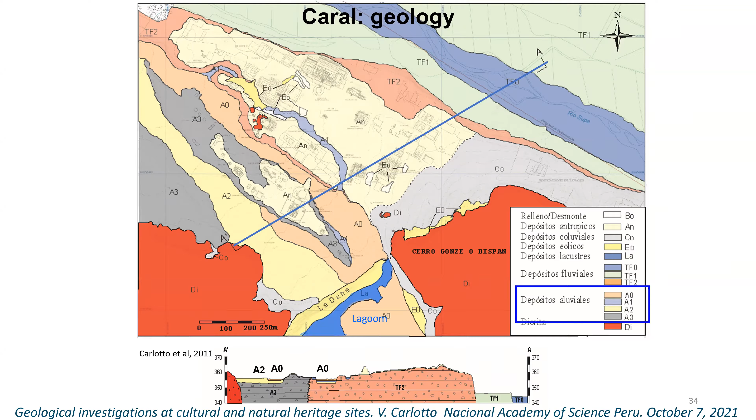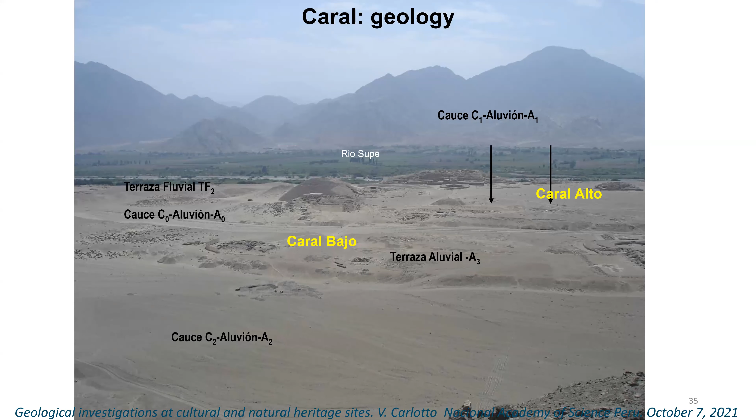In this photo, we can see the alluvial and fluvial deposits, as well as Caral Alto and Caral Bajo, separated by the alluvial channel. In this map, we have marked the alluvium A1 that appears as the remains of a small channel C1 developed on the fluvial terrace. We think that it has been originated by the overflow of alluvium A1, but to a large extent it is covered by the alluvium A0 that is later.

This alluvium A1 seems to affect the construction of Caral Alto, particularly the circular structure, the central pyramid, and the pyramid of the Quarry. By this relationship, we can say that the alluvium A1 would have occurred between 4,600 and 4,400 years before present, which is more or less the date of the construction of Caral Alto.

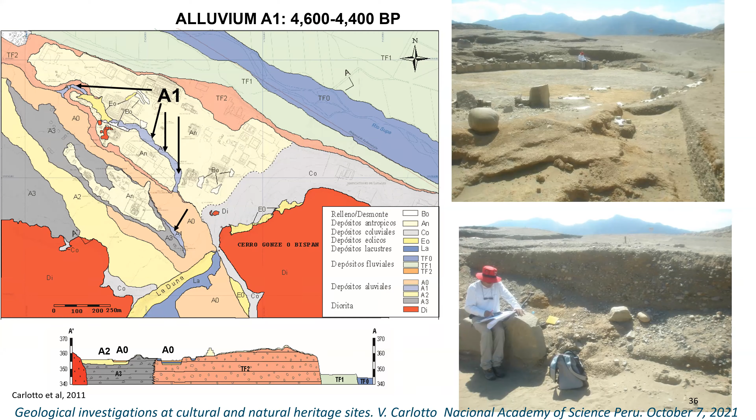Here, we see the alluvium deposit A0 that affected Caral. Interpretation indicates that this alluvium affected the dune and the northern part of the pyramid of the amphitheater. Then this pyramid was rebuilt and adapted to the new channel. Consequently, the age of this event A0 is during the construction of Caral Bajo, which according to archaeologists is slightly posterior to Caral Alto, and we think can be between 4,300 and 4,200 years.

The dune is the southern limit of the sacred city of Caral. It has a length of 600 meters, a width of only 10 to 20 meters, and is pyramidal in shape. It covers the entire width of the Chupacigarro stream.

Lacustrine deposits have been discovered to the south of the dune, but not to the north. This indicates that the dune would have acted as a bar, blocking rainwater and forming a small lake. It is interpreted that the dam was built by the people of Caral after the A1 alluvium that affected Caral,

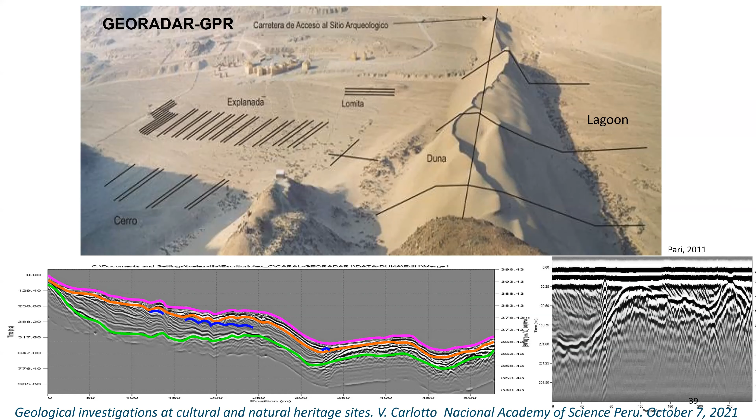This wall could have been built by the people of Caral between 4,500 and 4,300 years before present, in order to stem an alluvium and avoid the destruction of the city. However, this artificial barrier or dam held the water back, forming a small lake, but was later covered by the dune.

Within this graph, I want to show the chronology and interpretation of Caral. Alluvium A2 is older than 5,000 years before present. Alluvium A1 affected the first construction of Caral Alto between 4,600 and 4,400 years before present.

The dam would have been built around 4,500 to 4,300 years before present to protect the city. The dam blocked the waters of the Chupacigarro stream, probably related to the Niño phenomenon, and formed a lagoon.

In full occupation of Caral, between 4,300 and 4,200 years before present, there was a new alluvium A0 that destroyed part of the dune and the pyramid of the amphitheater.

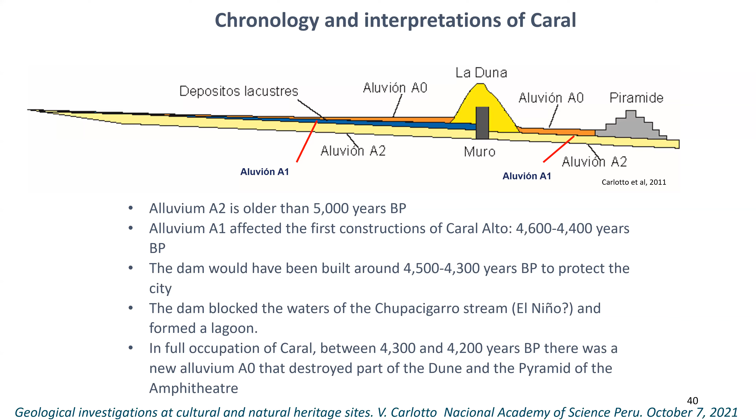Finally, I want to say that the people of Caral made highly engineered pyramidal constructions that allowed their conservation to this day after more than 5,000 years. That is older than the pyramids of Egypt. What we see here is the birth of Inca engineering.